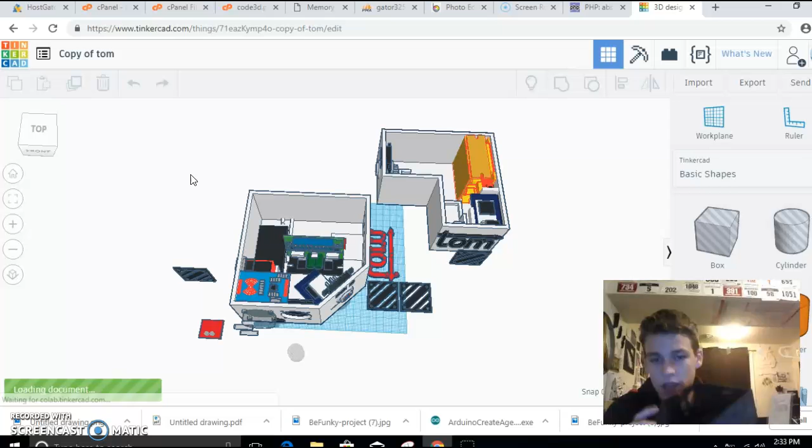So I'll show you some of the stuff that I made. This isn't nearly as intricate as some of the other stuff that I made, but this was some 3D models for a 3D display that I made. In fact, I have the 3D print right here. So here's the 3D print of this. Okay, very smooth. And I'm just going to show you some tips and tools on how to use this effectively. So here we go.

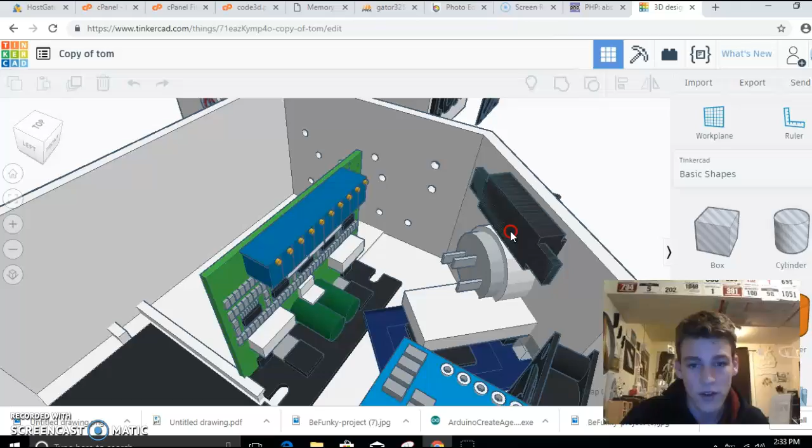You can see fans and sensors, chips. So let's go ahead and create a new file.

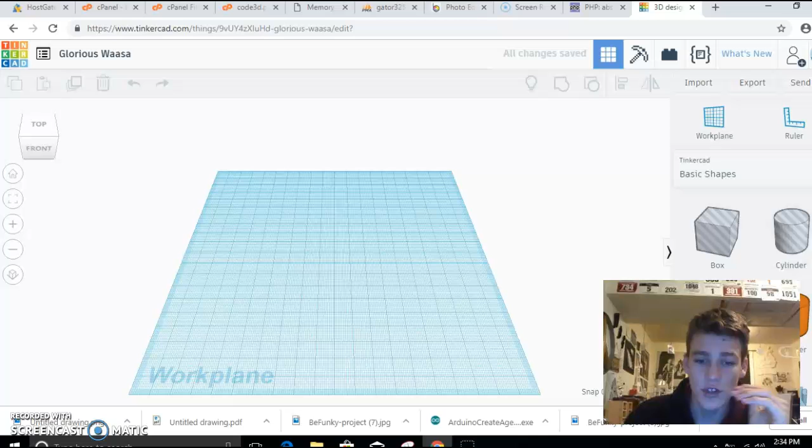Now I don't know about you guys, but I like to use everything in millimeters or metric, not imperial. So it's already going to be in millimeters. When you're first starting out, I'm going to move this over here, guys. You can leave it at 1 just to get used to everything. But I recommend that as you slowly progress, go down to 0.5 or even 0.25. I stick at 0.5. Don't really go to 0.1 unless you absolutely need to. You're just going to throw yourself off and not get some clean lines.

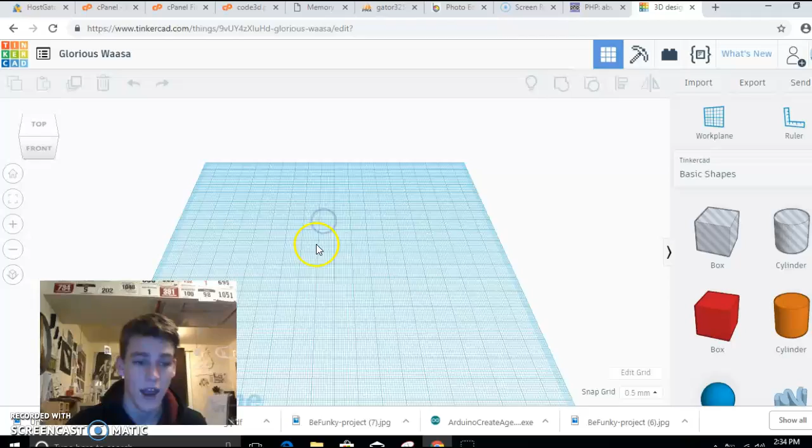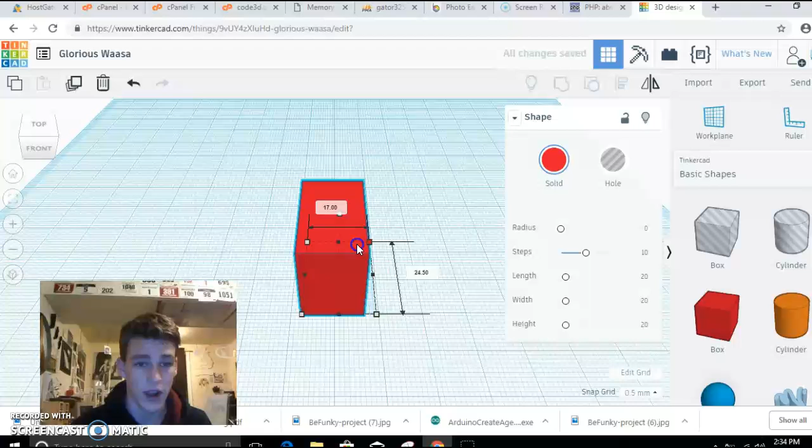So we drag a box out here. The box is 20 by 20 automatically. Now there's a few things you can do with this box. You can hold down Shift and you can drag one of the corners in. You'll change every single dimension. Or of course you can just change the size of it by dragging, click to it. To move around the screen, you can use your right clicker on your mouse and go like that. And if you click down on your scroll bar, you can actually move around, and you can zoom in with your scroll bar as well.

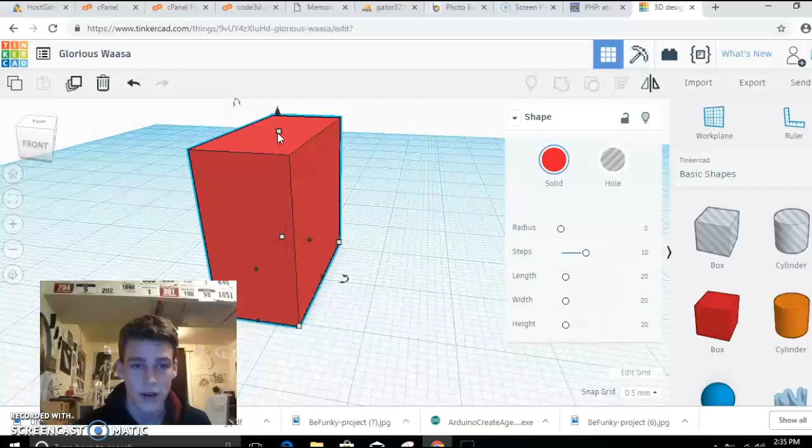So here we have this, and let's squish it out here. Okay, now let's drag out a cylinder. We'll go ahead and use Shift to pull that down. This arrow here moves it up.

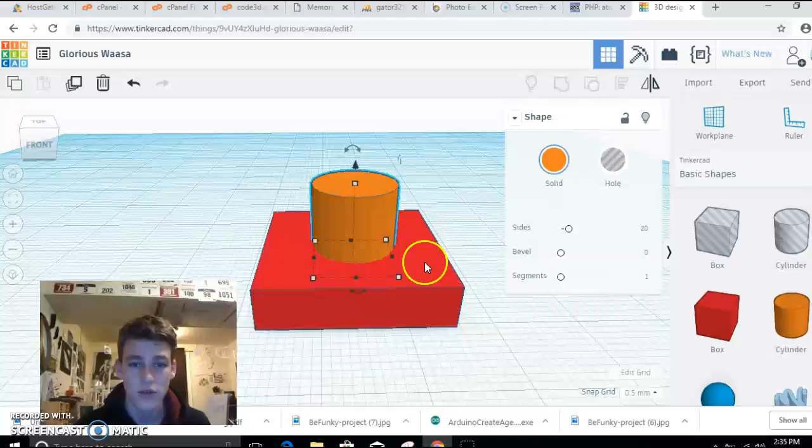Pretty common sense. Now, if I wanted to group these things together, one thing you'll notice is it changes the color of one of these things. And to group them together, you can just select them all, or you can hit this and then hold Shift and click the other one. And then you can hit Control G, or you can hit this button right up here, which is blue. Now you'll see it changed to red, but it's now all one design here.

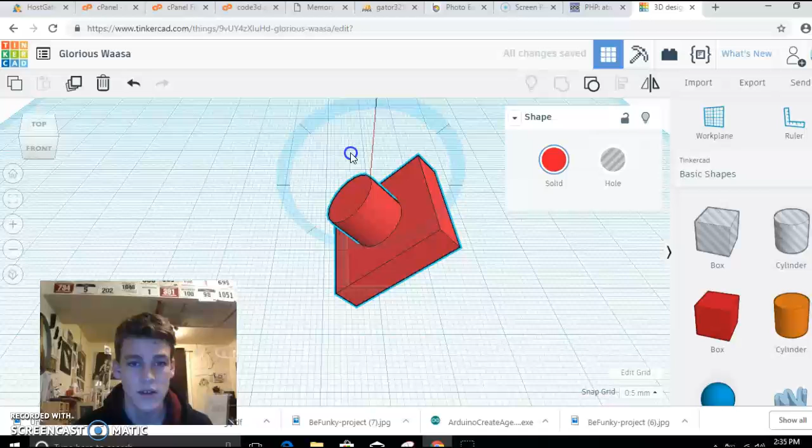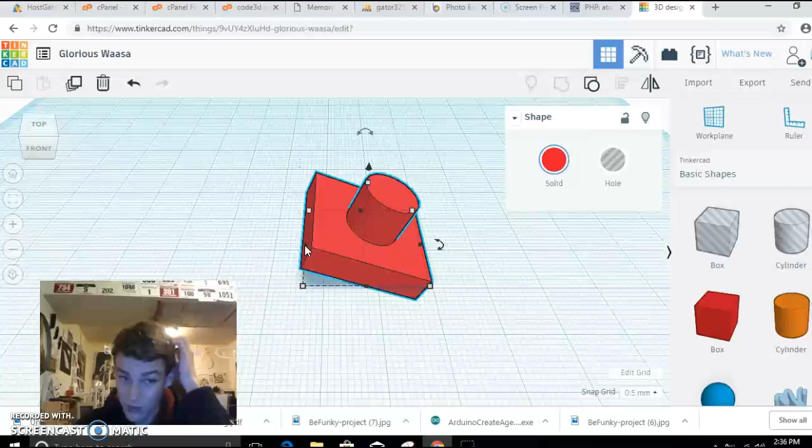We can rotate this. If you hold down Shift, you'll get exact angles, and if you go regular, if you stay in towards the middle more, you'll be about a 15-degree change, and if you go out, I think 12.5 degrees, I'm not sure. But yeah, so you can rotate it like that. One thing is when you rotate it, you'll see that when you expand it more, you're not expanding it vertically like the coordinate system is going with you. You're expanding the whole shape kind of weirdly.

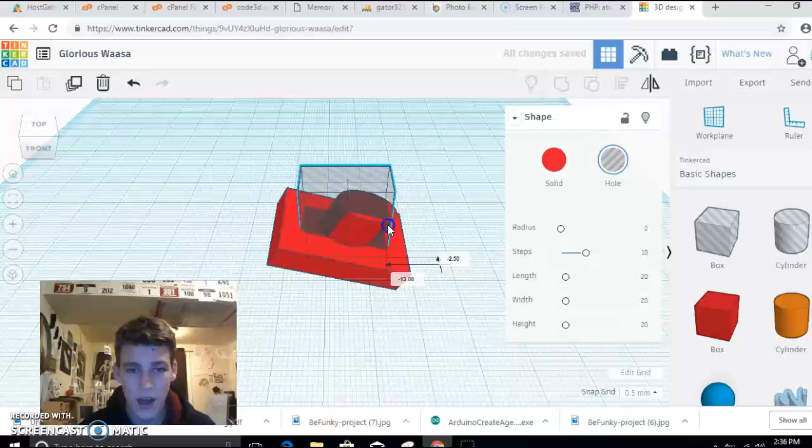So a cool thing that you'll need to do eventually is, maybe I need to take a little dent out of this. Okay, so you put this here, or whatever you want to use. And if I needed to cut a hole here to, say, put a block through if I'm 3D printing this, you're just going to hit this and then click whatever objects you're wanting to make a hole through, and then just group it. And as you can see, there was where my thing was, and now it actually took that out of the object. These are all still the same piece.

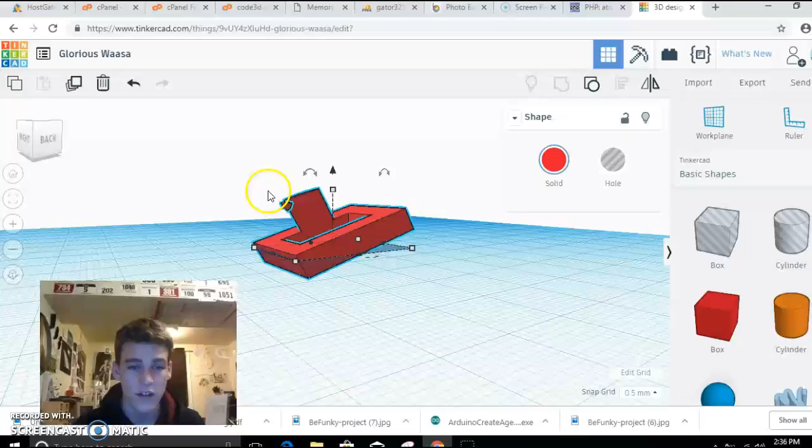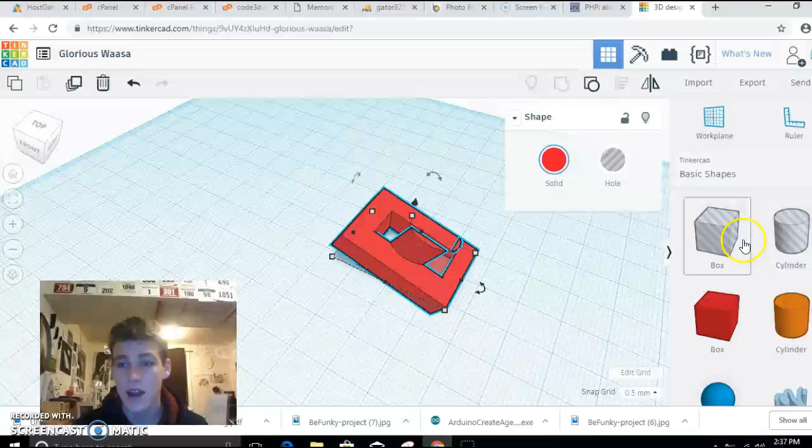So really, with that basic knowledge, just a 5-minute video, I promise you can create a lot of cool things. Using the snap grid to your advantage, knowing how to use these boxes, that you can group them together with other stuff. And yeah, I don't want to make this video long. It doesn't need to be long. You can copy and paste with Control C, Control V like any other program in the world.

And when you want to make a 3D printed file, you just hit export and you make an STL. And OBJ is good for exporting into Unity if you want to make a game, and you also get colors with that. So yeah, that's pretty much it, guys. That's how you use Tinkercad. If you really need to know more, I can help you out, but this is kind of like the main stuff that will get you to the project that I just showed you before this.